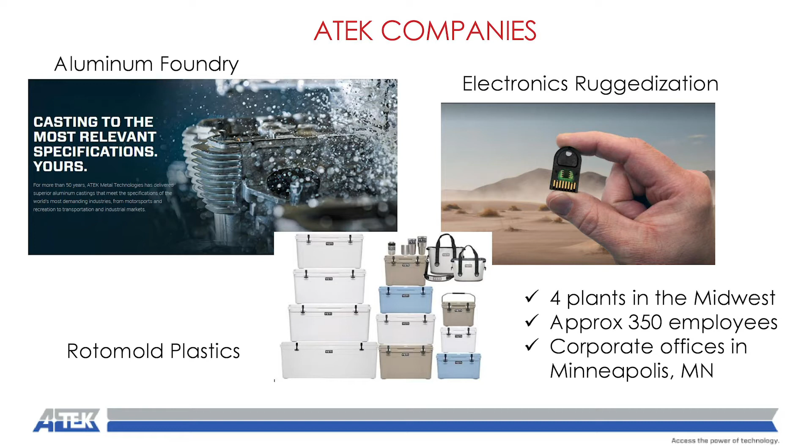ATEK is a manufacturer, an aluminum foundry that makes all the Harley-Davidson cylinder heads. We have a rotomold plastics company with a couple plants, doing a lot of the large Yeti coolers, but also plastic parts for Caterpillar, John Deere, etc. We also have an electronics ruggedization company that does crypto ignition keys and military-based secure memory. Within that group, we also do remote tank monitoring, which we've leveraged into our IoT asset offering.

Here's a look at our sites - typical manufacturing sites, all focused in the Midwest. Our clients range from aluminum to plastic to electronics type of clientele.

So we'll move into corporate projects and goals. My role from a reliability perspective is across our fleet of plants, with a focus on continuous improvement, reducing operating and maintenance costs, quality improvement, and value-add services around additional machining and work on our products to deliver a finished product for our clients.

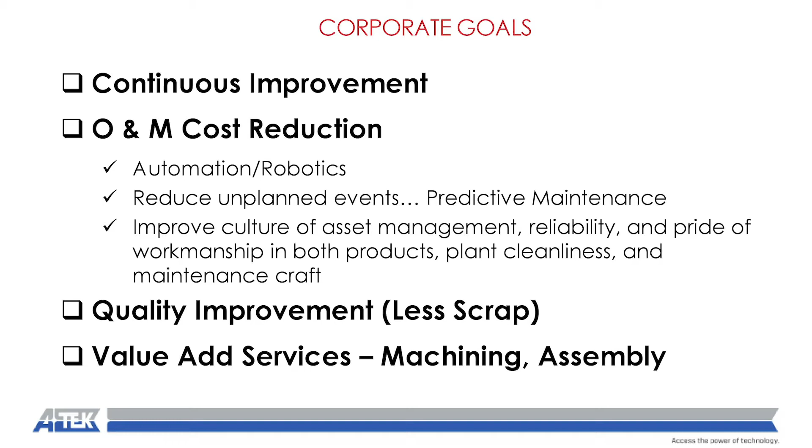The project goals we moved into were really focused on reducing unplanned downtime, using predictive or condition-based maintenance, and increasing visibility and accountability for our plant managers to take care of our assets.

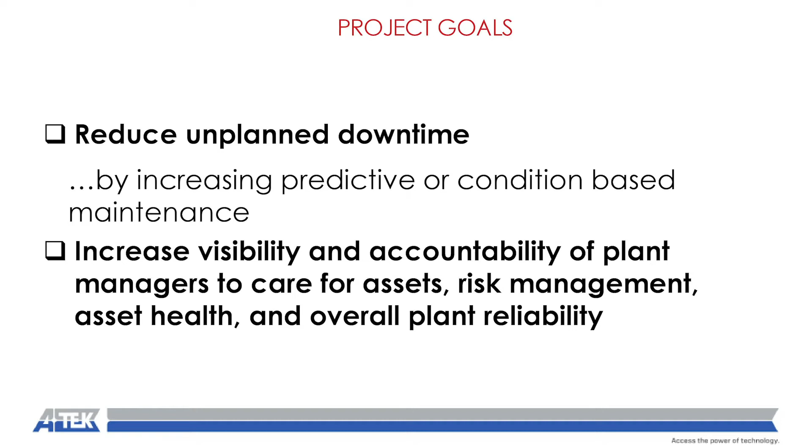Our plants are aging at different ages, and we're running into some asset failures - I'll highlight some of those. Within the past 24 months, we had a number of failures that I think caught us by surprise. They weren't debilitating failures, but they had an impact on our plants and a risk to some of our personnel. Of particular interest was a makeup air fan.

It's up on the roof of one of our aluminum foundries. We had a hard failure that cost us over $30,000 to repair. We had a second failure on that same fan that was a $10,000 fix.

We had a plant air compressor - we had backup air there, but the maintenance cost itself of running to failure was a $20,000 event that we wanted to figure out if we could avoid. Then we had some exhaust fan failures. Primarily the root cause, we believe, was lubrication, and combined they were $12,000 in hard costs, not to mention the soft costs around all of these failures.

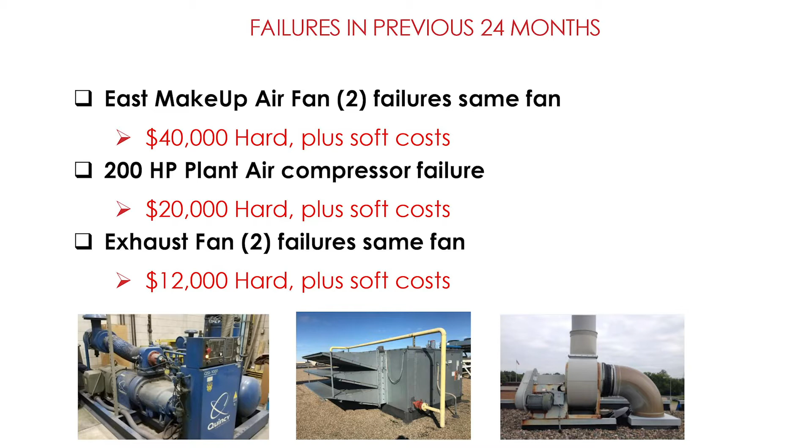If we just bring some pictures in - this is a 200 horsepower air compressor, screw air compressor we're speaking to. This is the east makeup air fan on our roof, and here's what an exhaust fan in our environment looks like.

As we went into this, of course in hindsight you can come back and look at things differently, but we looked at the failure modes of our equipment, the root cause, and really they were lubrication related. There was a bearing fault, a misalignment fault, and some imbalance faults because of our focus on fans.

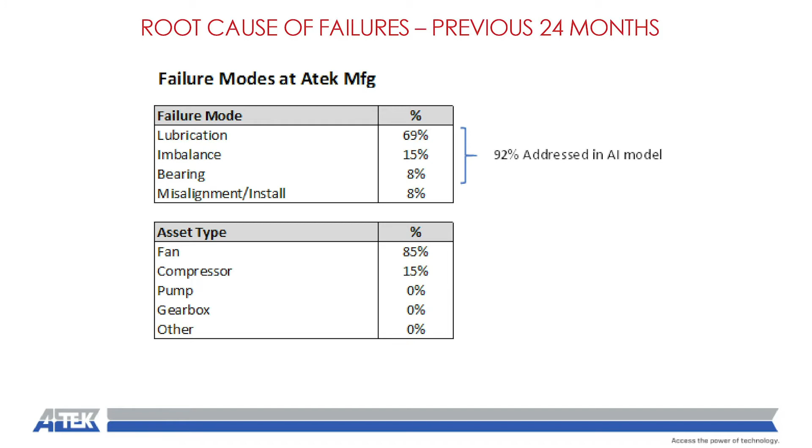The fans and compressors are the scenarios in our situation, and as I'll get to, we've got an artificial intelligence model that addresses our top failure modes.

So when we look at industry, how do our failures compare to what industry sees? The failures for industry are largely lubrication as a root cause as well. Some folks in industry will argue it's 40 to 80%. When I talk to some customers, they'll argue that I'm wrong, Craig - maybe it's closer to 90%. And then bearing, roller element bearing failures, and imbalance are the tops.

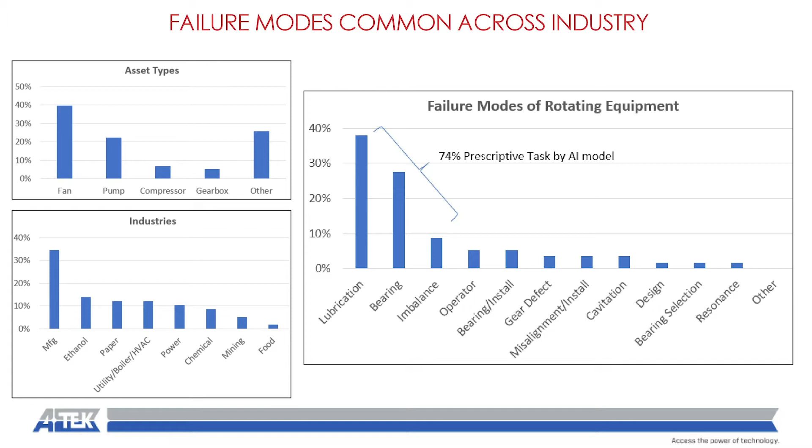The asset types can vary. Again, I'm focused on rotating assets - pumps, fans, compressors, gearboxes, and others. We have robots, we have conveyors, we have anything that's motor driven, essentially an element of it is rotating. The industries that this data came from were across the board, from manufacturing to ethanol to paper to power to chemical, mining, you name it.

So just to fast forward to our results, and then we'll fill in the gaps as the presentation goes. As I mentioned earlier, we had an east makeup air fan failure. We put our monitoring in on our systems, and we were able to identify a problem on our west makeup air fan. We'll give you more detail, but this is the wear in the shaft that we found on that fan.

We were able to tie out, in this case, because we had a previous failure and knew what the catastrophic damage was, so we had hard costs that we could be very firm on for the avoided cost of failure of this fan. Additionally, we had mentioned a 200 horsepower compressor that had a failure.

This is our 300 horsepower compressor. They're redundant. And here is the defect on the bearing. If let run to failure, it would have resulted in similar hard costs, maybe a little bit more on a bigger motor. So we're able to tie that out as well.

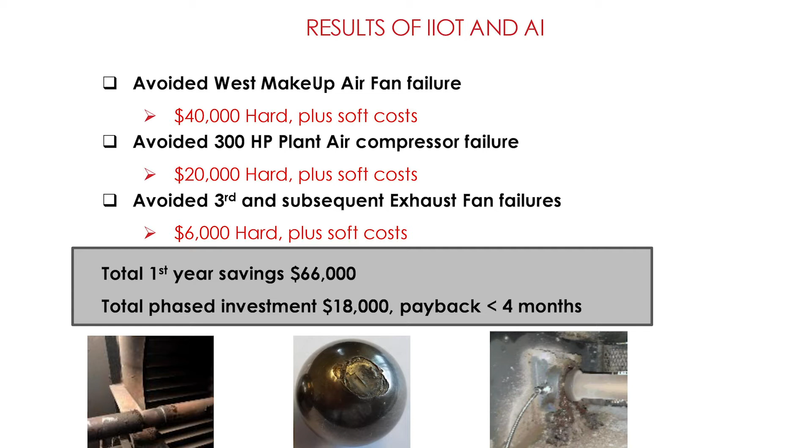So let's fill in the details of the project and the technology. As we looked at the project, of course, we had many things we wanted to accomplish. What I wanted to really highlight is that it was very clear our alerts couldn't just be an alert.

They needed to provide a very clear, concise, descriptive action. And then two, we wanted to be able to monitor this from afar ourselves, as well as bring in external help very easily.

So when we looked at deploying, if you looked at a typical plant environment with the infrastructure, you've got your sensors coming into an I/O system, you've got your operations or OT environment, and then integrating to an IT environment, and then moving up into a cloud environment, perhaps.

With our assets being on the roof or in a utility room spread around our plant, we didn't want to invest in infrastructure just yet. So we deployed cellular technology and beamed it from the sensor directly to the cloud. And we really preserved it as a separate system to establish our security, so we didn't have ties back into our operations. By being separate, we were very secure from that perspective.

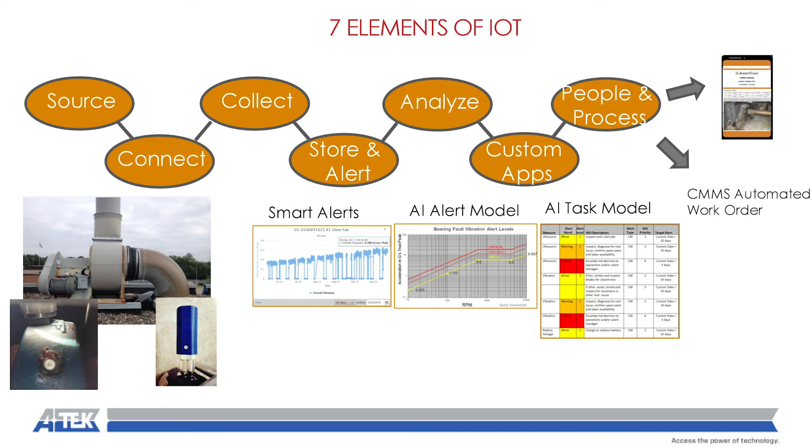We also deployed an artificial intelligence model, or a rule model. In our case, we arrived at RPM as our feature set, so when we did our work, it was a hybrid model of machine and human learning. We could set alerts not based on statistics or past data or machine learning, because that data was not available to us in the time we wanted it—we wanted to see if we could deploy alerts for our assets right out of the gate.

And then we have an AI model, or artificial intelligence model, to take an alert and break out the alerts by their different severity, and create a very descriptive or prescriptive explanation of exactly what you need to do as a maintenance guy when you get this alert.

And then ultimately deliver that into the people or process via, in our case, the CMMS system, so we could automate that work order. So nobody's really watching this. They can get an alert on their phone, but what's more interesting is getting that alert into an automated work order so they can use their existing processes and existing people to execute the work.

So we'll go through each one of these sections in some more detail. For the source, we were interested in getting the right sensor in the right location, with the right sample rate, with the right edge computing.

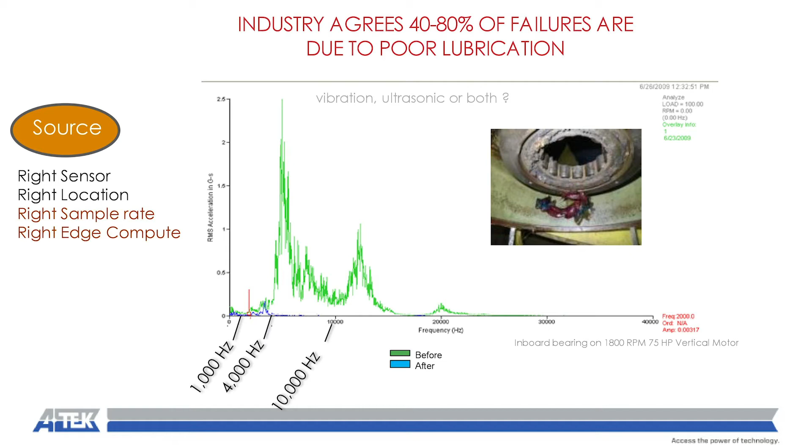If you looked at our biggest hitter, lubrication—if you looked at the vibration and ultrasonic data, you'll see that green is the failure and blue is what good looks like. Most of the energy in a lubrication fault is above 4,000 hertz. Many of the vibration sensors available today in this space are 0 to 1,000 hertz. They're great at late-stage failures like imbalance or misalignment, but vibration by itself, 0 to 1,000 hertz, does not give you that predictive or early warning. That's in the ultrasonic space. So we were clear to make sure our sensor measured what we wanted to remedy.

On the connection piece, Wi-Fi or cellular—we again chose cellular because we wanted to leverage existing infrastructure, and our assets were spread out. We wanted device management capability, so we can trend our connection attempts, trend the temperature of the electronics, trend the signal strength, and so we can not only troubleshoot at any given time, but also know how that looked over a period of time. That was important to us.

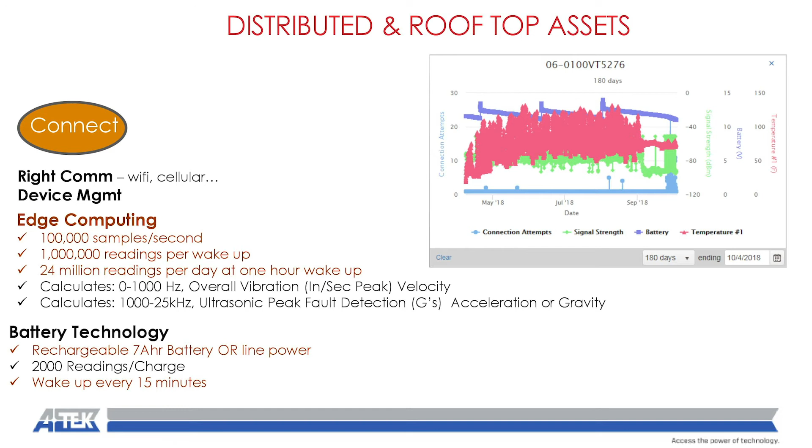In the edge, if we're using a sensor that can do ultrasonic, it's sampling at 100,000 samples a second. To push that data over cellular would not be practical, so we process that on the edge. We wake up, we take 10 seconds of data—that was found to be most useful. So we take 1 million readings per wake-up per sensor. We're typically doing a 1-hour wake-up on these devices—that's what you'll see on our trends. So we're taking 24 million readings per day. That's a lot of data.

And so our approach to handling big data over our environment is to crunch that down, reduce it into calculations of the 0 to 1,000 hertz overall vibe, which is good for late-stage problems like misalignment, imbalance, looseness. But what's different and important is the 1,000 to 25,000 hertz range, to get at these peak faults around lubrication or bearings.

And those we can get early warning 30, 60, 90 days in advance, which allows us to plan and schedule that maintenance. The next piece is powering technology.

We went with a battery that will allow us to do 1-hour update rates. We could line power it, and we could wake these up if we have something we want to troubleshoot. We can do as fast as a 15-minute update rate, but it consumes your battery faster. So we wanted that flexibility.

On the connection side, working through these 7 elements of IoT as we look at it, connecting it and making that work. If we didn't have cellular for whatever reason, we wanted the ability for the device to store data, and when it made a reconnection, to forward that data and rebuild it. So we're time stamping our data in the edge.

So here's what the data begins to look like. This is our 300 horsepower screw compressor, and we're gonna look at that detail of information here in a little bit.

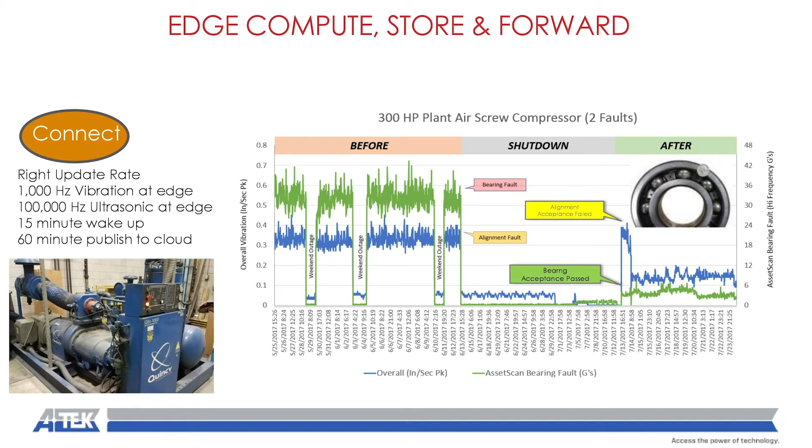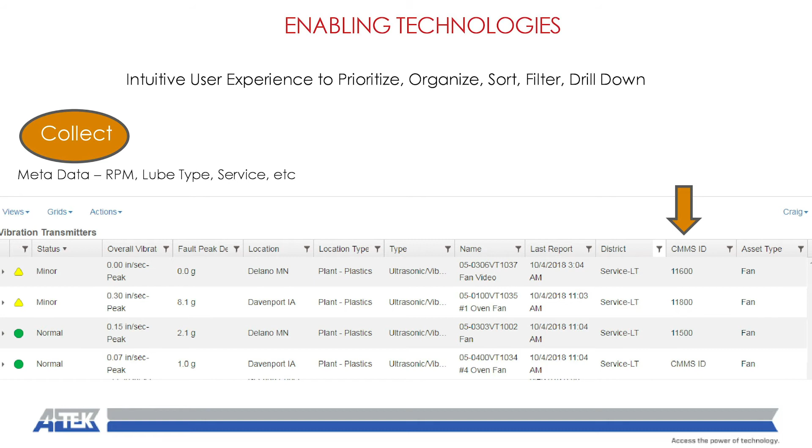Further on the enabling technologies, if you move to your desktop or laptop and you want to organize or understand what's going on with your assets, tabular view with the standard filter, sort, drill down, we wanted to manage. But we also wanted to include metadata or additional data about that asset. So what RPM is it running, perhaps what lubrication type, and also CMMS ID, our maintenance management ID, so we can tie out what we're seeing with our sensor all the way to that CMMS system to generate that work order.

On the alert side of it, we wanted to get the right alerts. We were sensitized to getting too many alerts, because then when a real one comes in, you don't believe it. So we do a couple things. One is this function ignores the alarm clear, so we can tell if the machine turns off for a normal deal on the weekend, it goes to low vibration. We ignore clearing that, which essentially holds that alert on. So even if that asset had a problem and we turn it off, we still want to remember there's a problem, and we don't re-alert when it restarts.

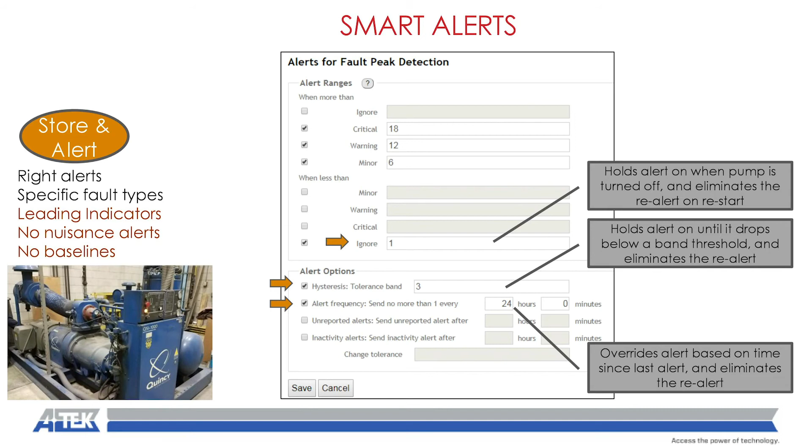Second, as we looked at IoT systems, not all of them really had this hysteresis function. This has the ability to create a deadband around that alert, so it'll trip at this level, but it has to clear well below that before we establish a re-alert. So essentially it has to be fixed before we re-alert.

And then just a belt and suspenders approach, here's a scenario based on time. Hey, if there's something wonky going on here, I just don't want to hear from that but once a day. If we're truly being predictive about this and we're seeing things 30, 60, 90 days in advance, I don't need to be alarmed on it every minute it happens or every hour. I want to have some reprieve from that.

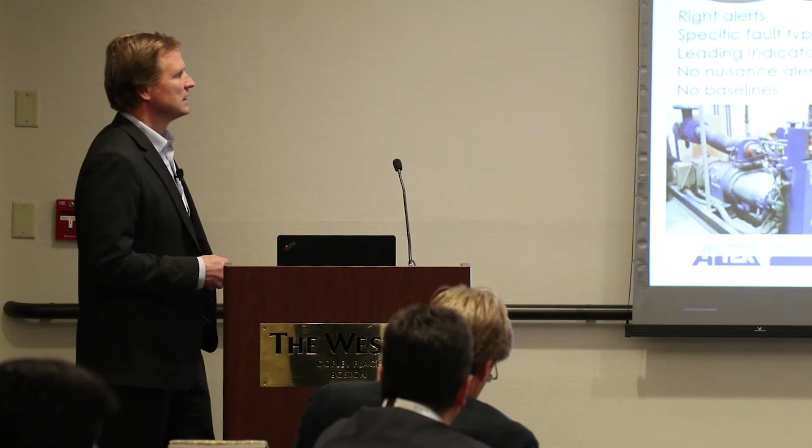So here's our scenario around our rules or our model around setting alert limits. What was troublesome when you would set a baseline is if you had an asset that already had a problem, you didn't have a viable alert. So you started out your IoT journey missing something, and that was a problem for us. Again, we're targeted at lubrication and bearing faults, and imbalance is on our next model.

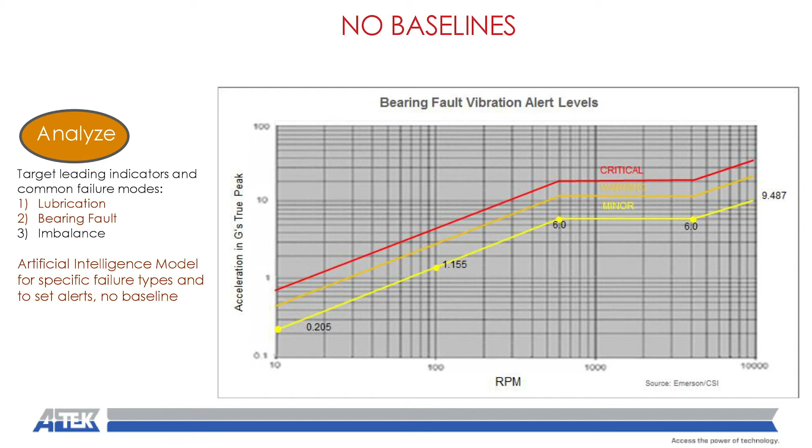But this is just looking at our high frequency in Gs, or units of acceleration. If the asset, depending on the RPM, is the only factor that we use to set the alert, and our assets all ran between 600 and 6,000 RPM, so we could use 6, 12, and 18 Gs universal alerts across our assets.

And then for the vibration, which is naturally a later stage problem, we use the ISO standard, ISO 10816. Again, it's driven a little bit by RPM, and our alerts there were 0.2, 0.5, and 1 inch per second. And this is good, again, for misalignment and imbalance.

So again, using a baseline to set the alerts and detect an anomaly would produce some nuisance alerts for us, we felt, and there was no context of the severity. So as soon as I get an alert, the questions from our plant were, now what? What do I do? What's the severity? How fast do I need to respond? And so by using a model, we were able to address that.

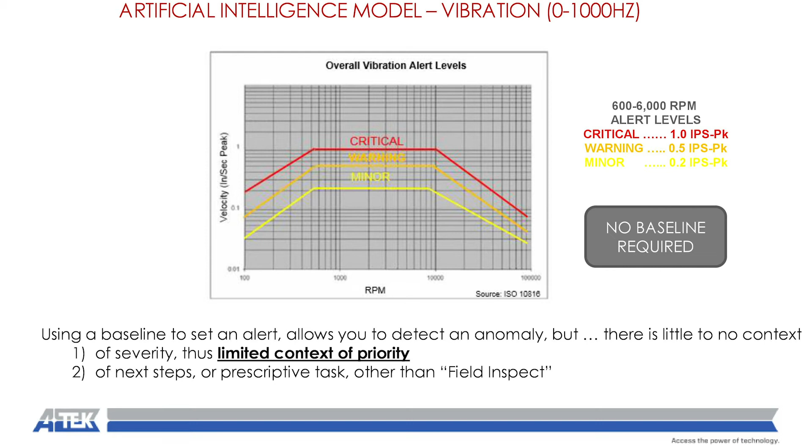So again, back to this scenario. When we did our analysis, this case, when we started monitoring it, we had a pre-existing condition we didn't know about. But we were able to see alerts here are set at 6, 12, and 18 Gs on our acceleration, and they're set at 0.2 and 0.5 inches per second on our vibration. The green line is our ultrasonic, or our high frequency.

The alerts are over here. It's very high in alert. And we had a secondary problem of a misalignment showing up on our overall vibration, again above the alert generated by our AI. So we didn't re-alert on our restarts here.

We had that set, and we identified this in May, and we had time. Again, the mentality of this plant and our plants in general is it's still running. It's not shaking that bad. We got a lot of worse shaking machines in this plant than this guy.

How do you know? And we said, one, our AI alert model is based on hundreds of thousands of assets and data points. How do you know it's not good? And we had a fortunate position that they had a catastrophic failure on their 200 horsepower air compressor, and we had the discussion: are you willing to take that risk?

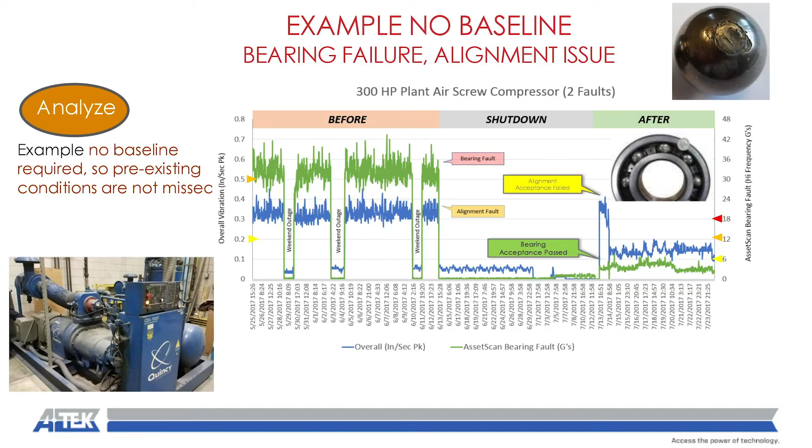That motor had been in and running for many years. I think the plant is 17 years old. It probably was original. And they said we probably could afford to send this motor in now because we had a motor fail on us that cost us quite a bit of money. And so when they took that motor out and checked that bearing, there was the defect in the bearing of the motor. And so this green line, here's what good looks like.

So this is a 4th of July outage. They took out and did this work. They could plan and they could schedule it. When they started up, alignment was still an issue.

So we went back and we told the contractor what he needed to do. He didn't do it. We had the data to do the acceptance test. We called him back on his tab and timely to correct that alignment. And this is what a good alignment looks like, again under the threshold here, and green under this threshold.

So our plants are starting to believe in this a little bit, and we have rolled out to our plastics plants now. This is a case from our plastics plant, and so here's our data coming in there. This is from June of this year.

And so how would you set this, this is our scenario around machine learning and baselining. If you were to do that with machine learning, you would say perhaps that's your baseline. Perhaps that is your alert.

With our artificial intelligence for setting our alerts, we set that at 6 Gs, just like we did on our compressor, okay?

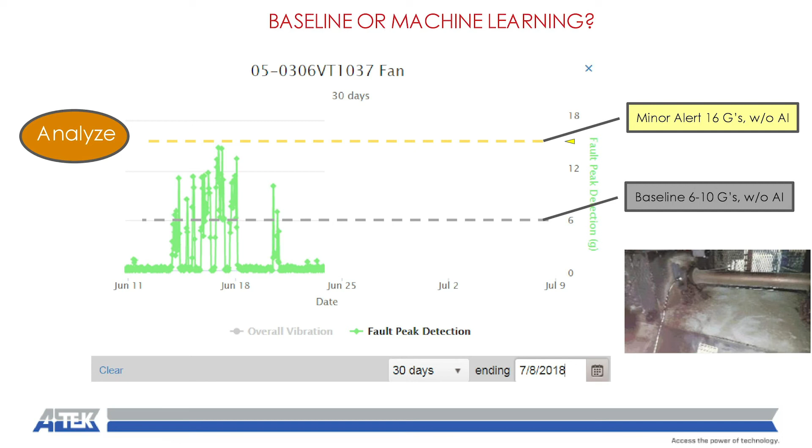And with our AI model for our work order, we can tell them very distinctly on a minor alert: go to the field, inspect, and lubricate.

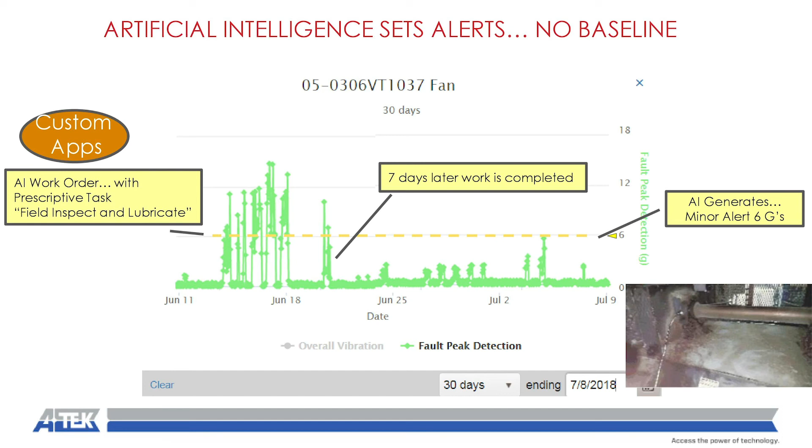7 days later, because in the real-world life of a plant, they don't just go lubricate when you ask them to, right? It's not an emergency yet. They get around to it. They have a backlog of maintenance that might be 10 or 14 days. That's very normal, right? And we want to, in the world of predictive maintenance, this is where I live.

But we chuckle at guys doing the vibration or condition monitoring because that's a reactive-based condition maintenance, right? We want to be predictive. We want to be early. We want to go into their normal plan.

And so they grease it 7 days later, and this is what that line looks like, okay? So if we overlay the vibration data, the blue vibration data, that does not see the lubrication problems.

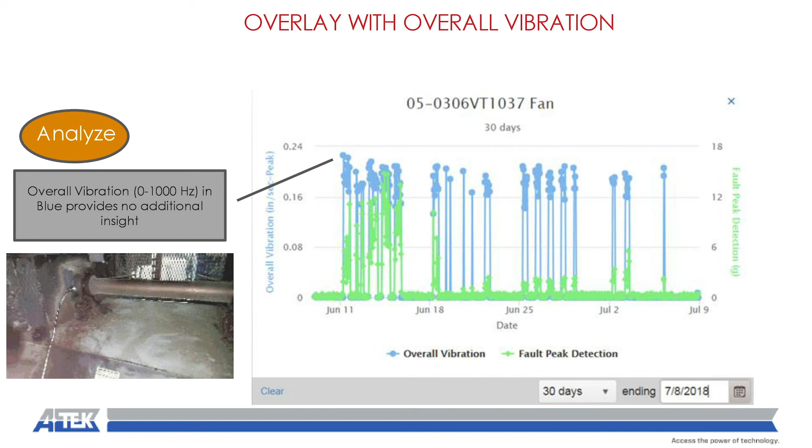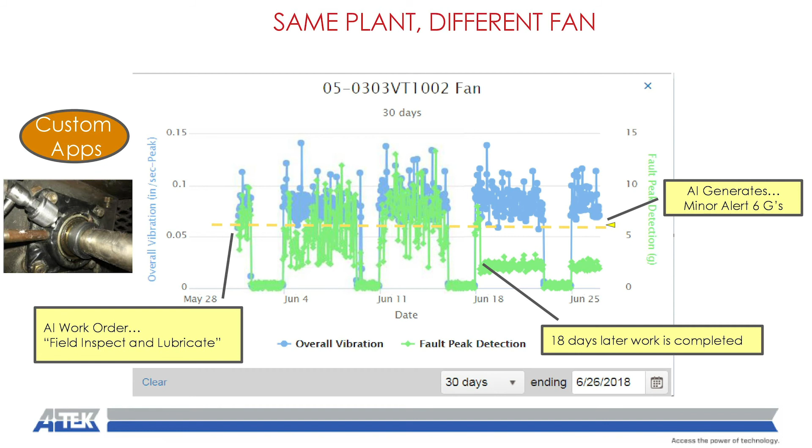And then, we watched this, about a month later we start getting alerts again. We asked these guys, what's your preventative maintenance schedule for lubing this? And they said, well, we don't have one, but it seems like we're getting an alert every 30 days. I think we'll put this on a monthly schedule, right?

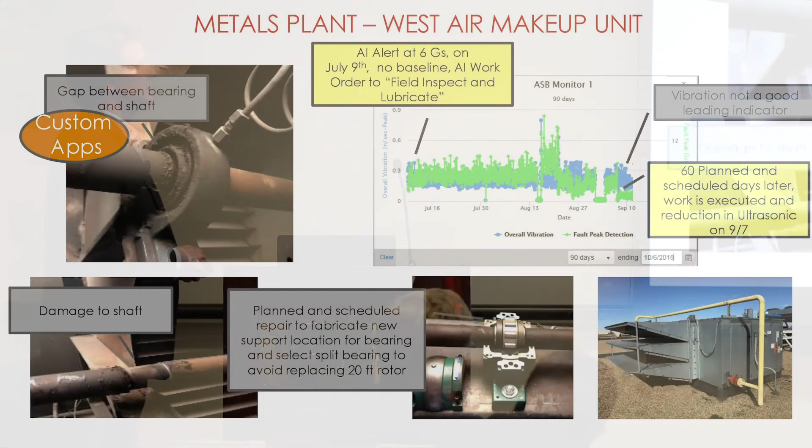So here's back to our metals plant. If you remember, our east makeup air is the one that failed. This is the one that we identified early. We had a nice, convenient scenario where they had the sister asset fail catastrophically, at significant cost.

They put the monitor on here on July 9th. It was 6 Gs. We told them field inspect and lubricate. They went and inspected it, and they saw a gap between the bearing and the shaft.

So they were able to plan to create a structure that they could mount a bearing on. They wanted to leave this shaft and structure in place, even though there was quite a bit of wear on this shaft. They felt they could create a base back in here and use a split bearing.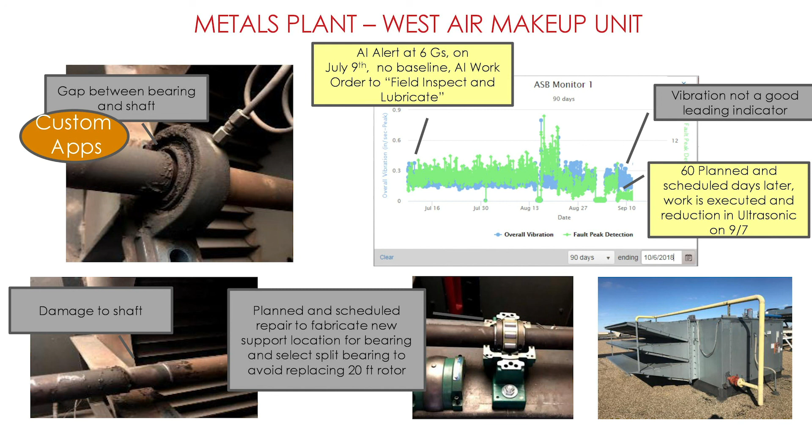They had never used a split bearing before. They had to field engineer this. This was not supported by the OEM. There was quite a bit of concern.

But they had a contractor they had some confidence in, and a maintenance guy who had some experience using split bearings. Given enough time, they felt comfortable doing a retrofit in the field. So they built that, put in the split bearing, and here you can see again what that looks like. But it was 60 days of planning and scheduling to pull off a modification like this.

So again, it's that ability to see it very early.

So we had talked about this artificial intelligence model, or our rules model, for our different alerts. On the ultrasonic or high frequency, we have 3 levels of alerts. On our vibration, we have 3 levels of alerts. Our big hitters are lubrication, bearing, and imbalance. So this one takes care of lubrication and bearing.

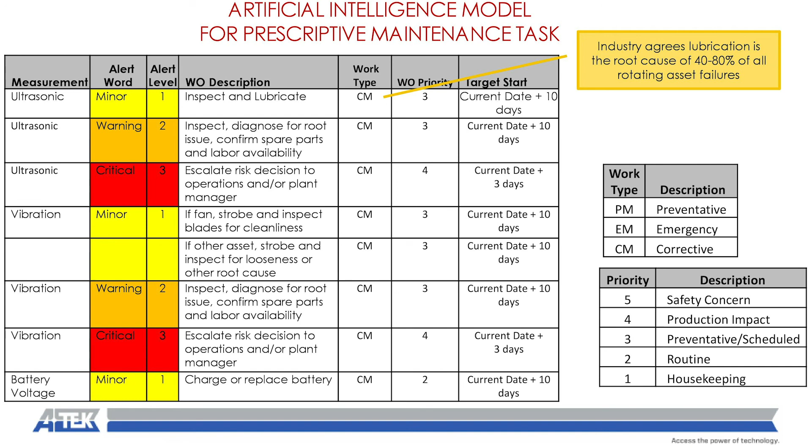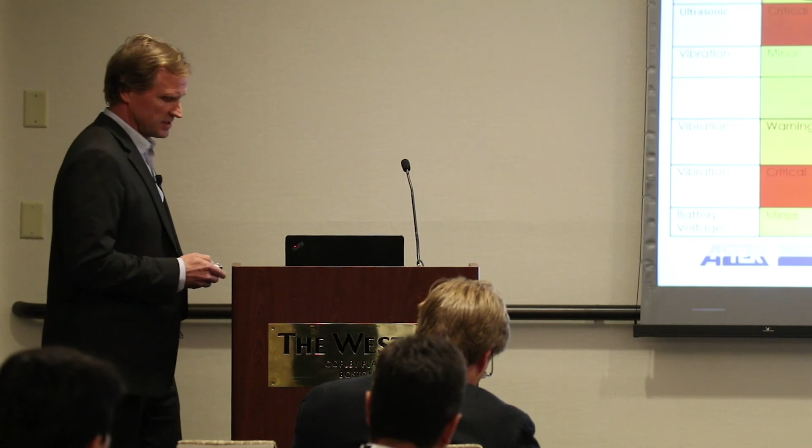And then this minor alert on my vibration, if it's a fan, so I have metadata if it's a fan, then I can strobe it and inspect it for cleanliness. And then I can evolve the actions from there. But this has worked out well for us so far.

So in concluding then, we look at this PdM value chain much like a chain, so it's only as strong as its weakest link. So when we looked at these 7 elements of IoT, we felt if we didn't get it right on any one of these, we would miss the end result, which is integrating to our people and telling them what to do.

If we didn't have the right sensor for monitoring vibration only, or tried using motor current instead, we wouldn't be predictive. If we weren't doing the right update rate or have the flexibility on the comm options, we would have struggled to deploy.

If we didn't have the ability to connect out to the CMMS with some metadata, we wouldn't get all the way to our people. If we didn't have the right alert tools, could you imagine all these work orders that would come out on you?

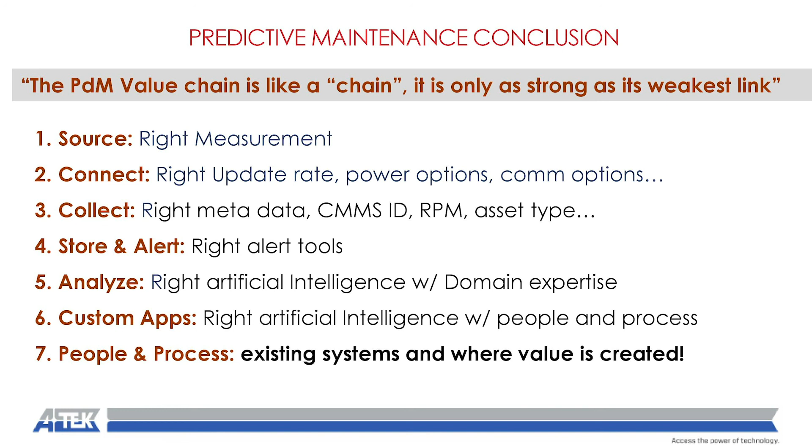If we didn't have the right artificial intelligence, we'd be missing all of these problems in our assets. And if we didn't have this app with this artificial intelligence to make it very prescriptive, we wouldn't be able to make this connection to our existing people and process.

So with that, any questions?